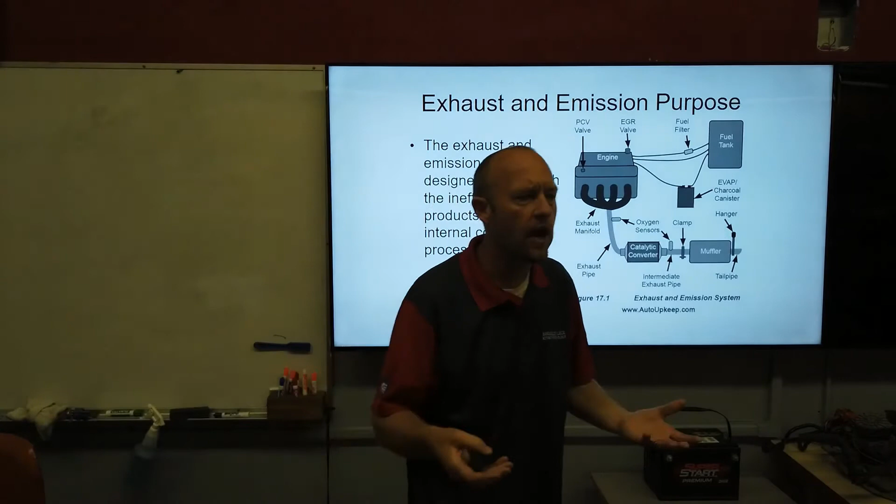This is a really basic overview of some of the emissions components that are there - the exhaust that is generated from a car. We understand from what we've talked about with fuel systems that if we nail that air-fuel mixture perfectly, then we really don't have emissions coming out the tailpipe. We have CO2 and water that'll come out the tailpipe.

But the reality is, in all the transient conditions of accelerating and decelerating and all the different air-fuel mixtures that the computer is having to produce to move this car down the road, the ideal air-fuel mixture is a hard target to hit. So vehicles do produce emissions, and we have a variety of different emissions components installed on a vehicle to clean up those emissions before they exit the tailpipe.

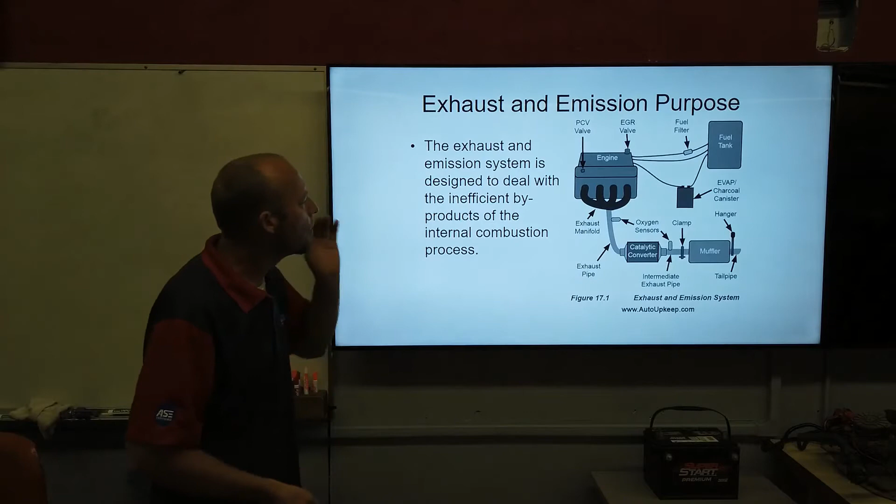The emission systems deal with the inefficiencies of our internal combustion engine. However, in modern times this has become an incredibly efficient engine, and the technology and monitoring systems that are there make it a very efficient engine. So we've got systems that are handling the different emission sources.

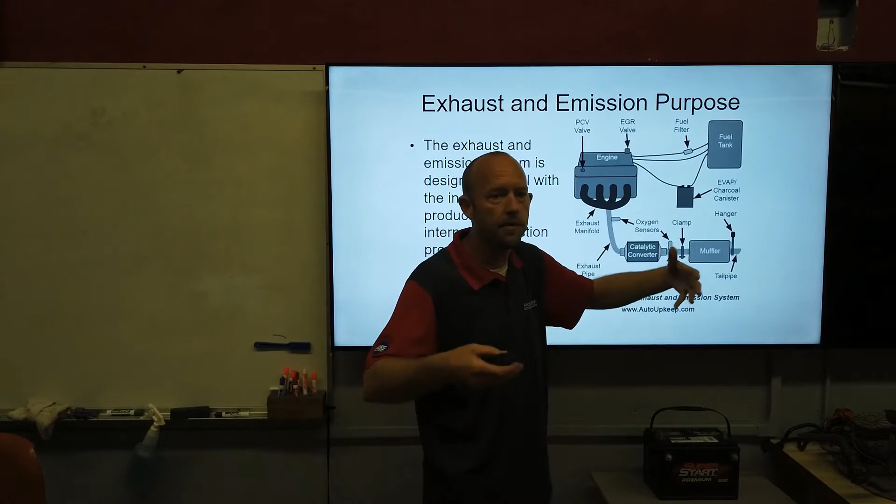Fuel by itself is a contributor to smog in our air. So we've got a system that manages any fuel that evaporates from the tank, called an evaporative emission system, or an EVAP system. Fuel vapor is captured and not allowed to escape out into the air.

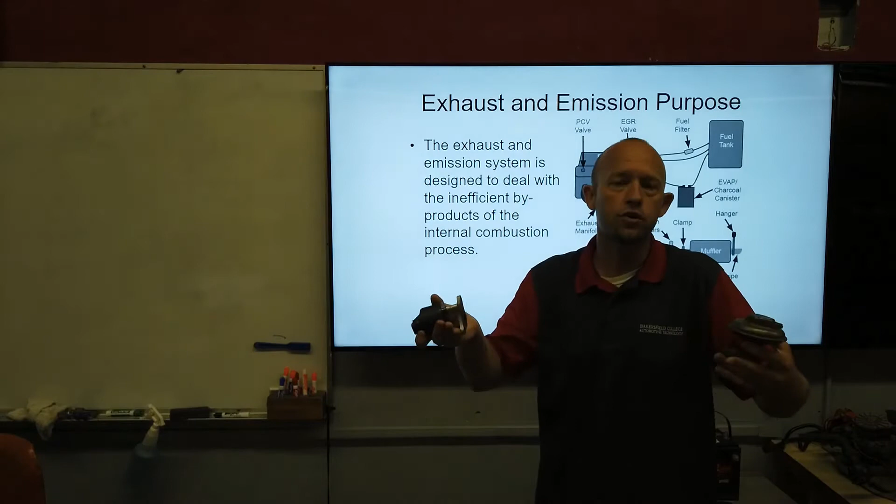We have an EGR valve - an example of those looks like this. This is one that is mechanical, vacuum operated, and this is one that's electronic. It's used to control NOx emissions, and we'll talk about how that is accomplished.

But we've got a PCV system. A PCV system stands for positive crankcase ventilation, and it's PCV, all right? Some people screw it up - they'll call it PVC, but that is a type of plastic pipe.

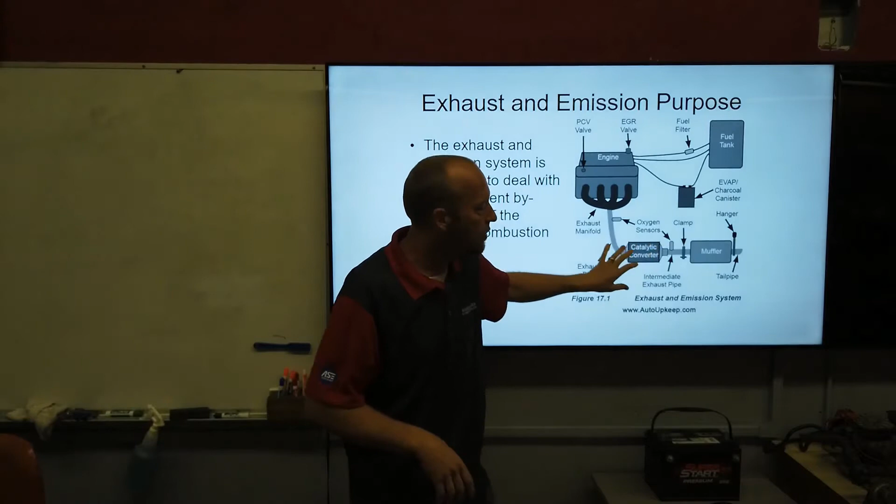The rest of this with the exhaust, we've got some other major components such as a catalytic converter, which is another place that we combust fuel in the exhaust and break down the emissions that we care about, which are HC, CO, and NOx. Those are the ones that we're trying to control primarily on our gasoline engines.

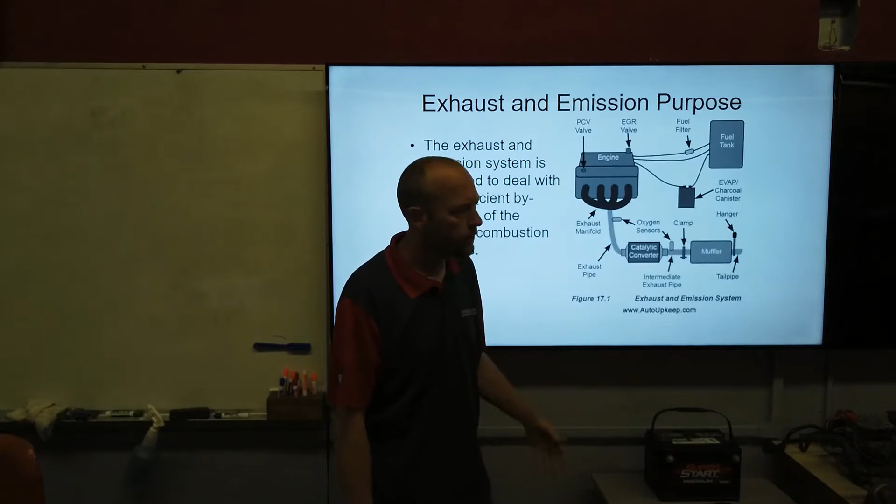And then we've got a variety of sensors that are involved to monitor all of these different emission systems. There's even some systems that are not listed here, but this is what you would typically have on a modern vehicle. Some of your modern vehicles don't even have an EGR valve - they'll just have the evap system, catalytic converter, and monitoring sensors.

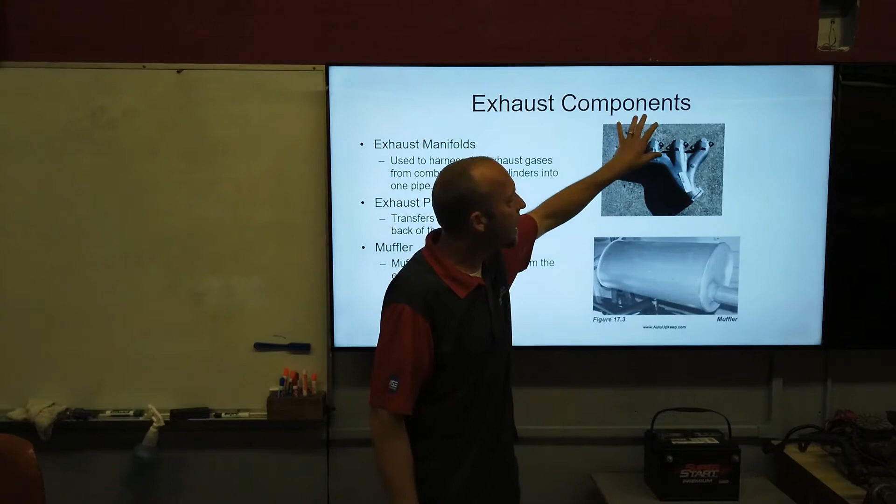So the exhaust on our cars is something that is a major source of the emissions that we deal with. Some of what I want to loop into this is just a general knowledge of exhaust components as well, and then we're going to get straight into some of our emissions. We've got exhaust manifolds that typically from the factory will be cast iron, or sometimes they're steel manifolds.

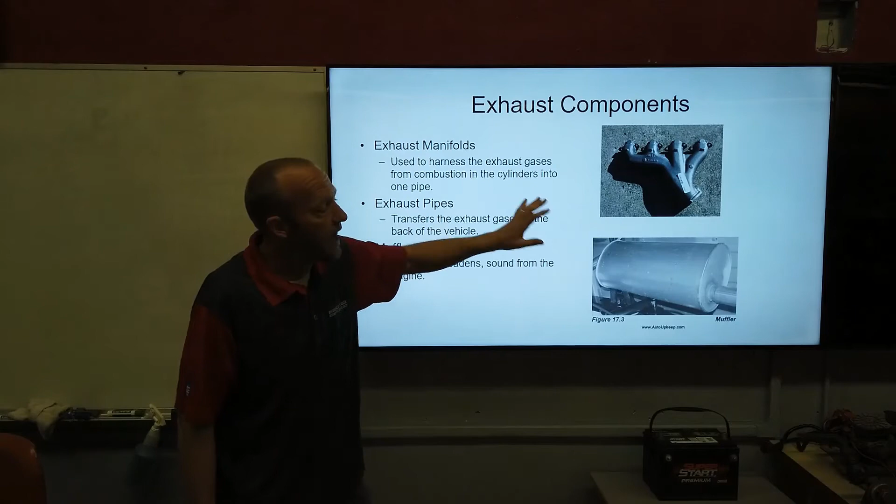We'll have mufflers that are designed to quiet the sound of the exhaust, although a lot of people will modify them to make them louder. Mufflers can be changed on the smog program. You don't even have to have a muffler on your car to pass smog. So you could cut past your last emissions device, which would be your catalytic converter, and just have a straight pipe from there, and that's not going to be an issue as far as passing smog. This is not considered an emissions device.

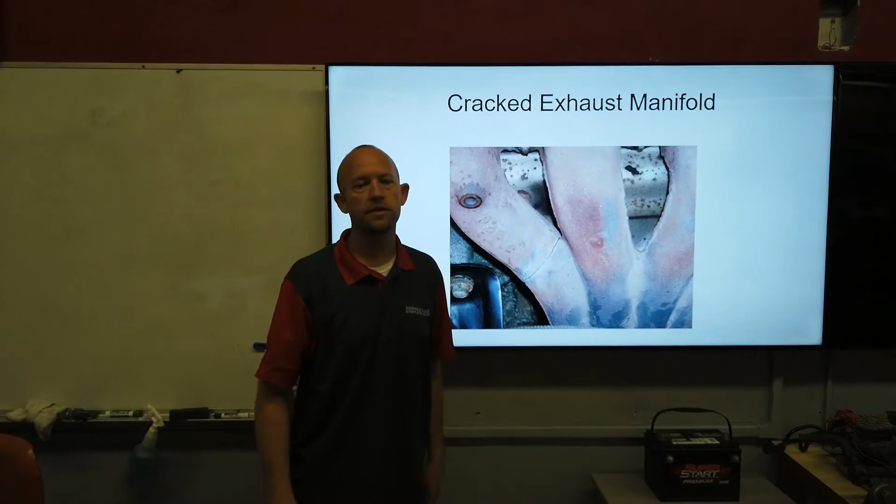However, the exhaust manifolds can crack, and that can cause problems with setting codes for catalytic converters or oxygen sensor codes as we introduce fresh air. Consider that the exhaust gets incredibly hot and then cools off, over and over, reaching temps of 800 to 1,000 degrees just on a gas car. That causes the exhaust to flex as it heats up and cools down repeatedly, which can fatigue it.

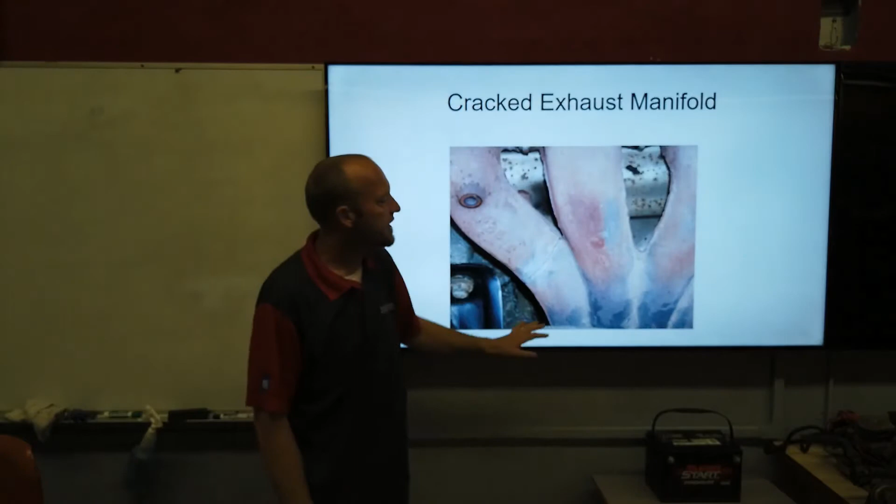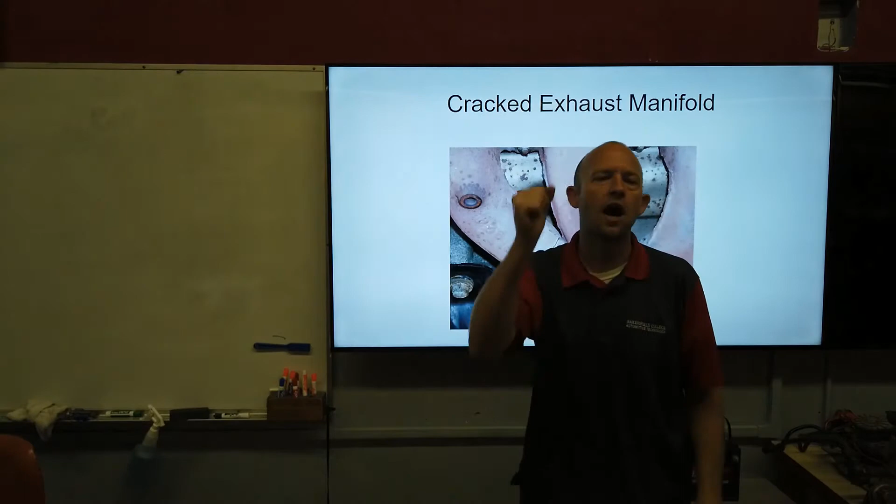Cast iron is brittle and it can crack. When you have a cracked exhaust, you can hear it. It's usually more noticeable in the mornings when the vehicle is cold. It'll sound kind of like a ticking, breathy sound. Every time we have that exhaust stroke and we're pressurizing the exhaust as we're forcing those gases out, it'll leak out of that crack.

This is something that we watch for. It can turn your check engine light on. It's not necessarily something that often causes a performance problem, other than if it affects an oxygen sensor and turns your check engine light on. But this is something that your car would fail smog for.

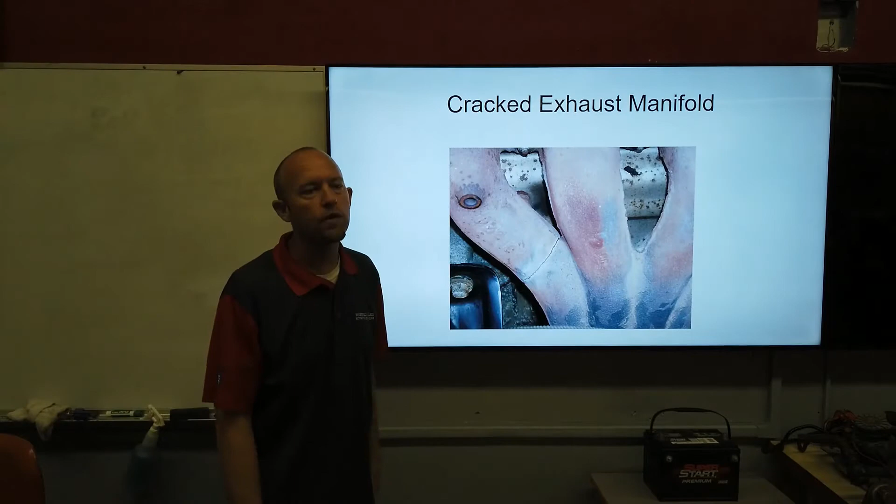Oftentimes stuff like this happens because of broken exhaust manifold bolts. If we have bolts that break, it allows that part to flex even more. Some of this is just bad engineering design from the manufacturer—they've designed in weak points that would fatigue and crack.

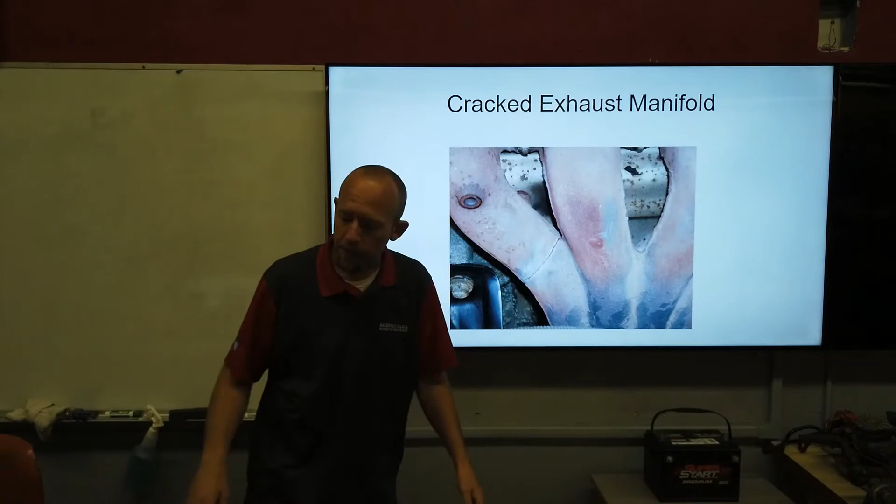The noises that you hear—you can often see black soot around the areas where the exhaust leak is, which helps detect where it is, and it can cause check engine lights to come on. Broken studs are probably one of the leading causes for broken exhaust manifolds, as well as broken exhaust hangers.

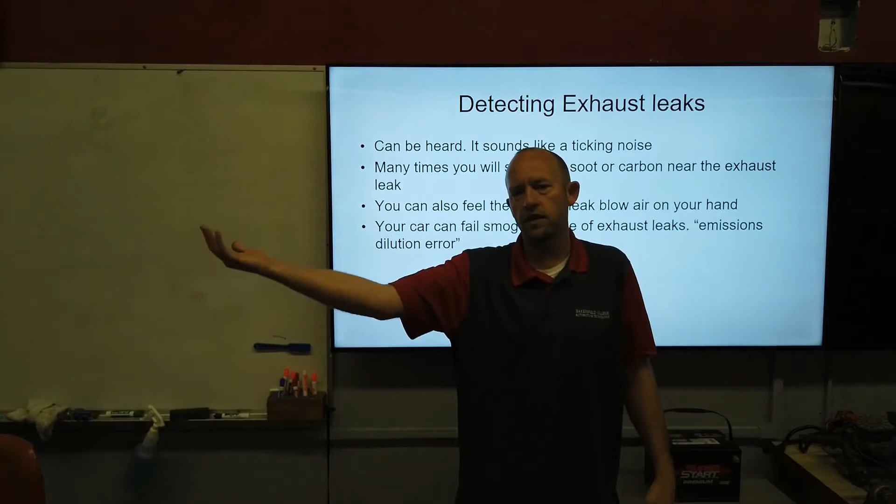The exhaust hangers support the weight of all that exhaust. As we break hangers, the weight of that exhaust lands on the remaining hangers as well as on the exhaust manifold.

So it's something that when I'm underneath cars, I take a look and make sure the hangers aren't broken. Some of you have seen cars where the exhaust hangers are all broken and the exhaust is dragging or almost touching the ground as they're driving down the road. That ends up cracking exhaust manifolds from the strain of the weight of the rest of that exhaust.

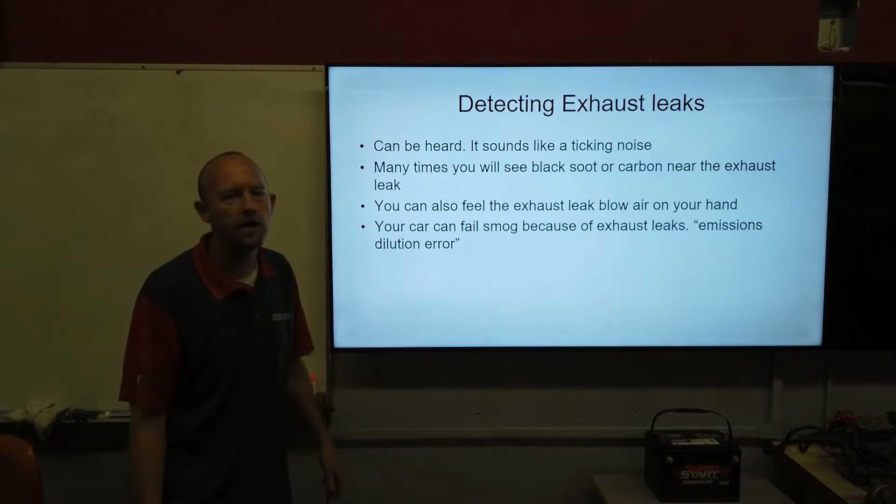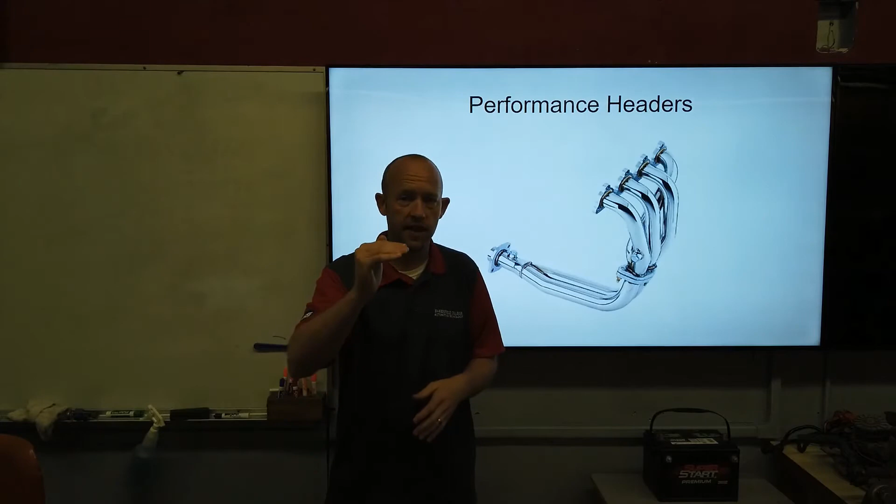The exhaust manifolds are something that's common to be modified on cars, so you get people that will put headers on their car. As part of the smog program, any aftermarket part that is not the stock component the vehicle came from the factory with has to be approved. When that car was sold new, it went through a rigorous testing regimen called the federal test procedures, to prove that vehicle meets the emission standard for that model year and class of vehicle sold.

So anytime we modify a part on the car—whether that's headers like this, aftermarket air intake systems, intake manifolds, camshafts, cylinder heads, anything that touches an emissions component, fuel tanks, even auxiliary fuel tanks—anything that has any potential effect on emissions has to go through a process of recertifying that car through the Air Resource Board in order to be approved for installation on any production car.

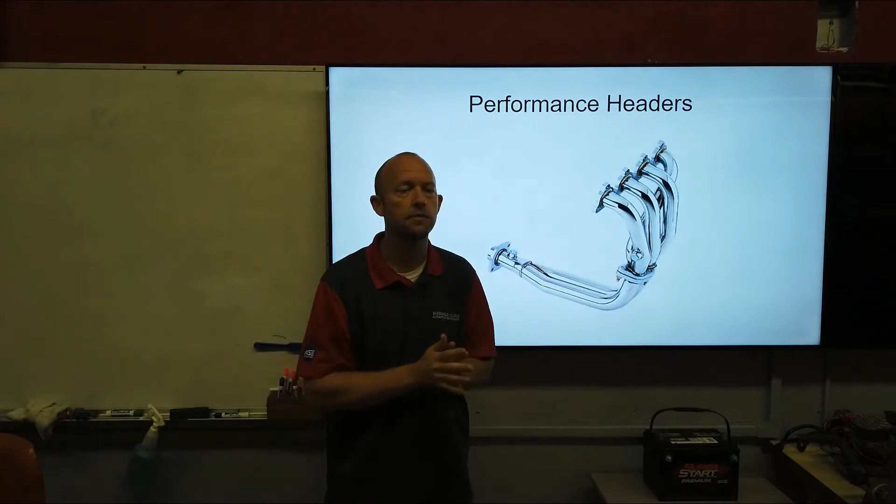When that part is approved, it will be affixed with, or come with, a label showing an executive order number and a part number that can be looked up on the Air Resource Board website. As part of the smog program, any aftermarket part—most commonly headers and aftermarket air intake systems like filters and ducting, the two most common things to see—we have to look up to see if it's approved to be on this car. I want to share something with you about the header that's up on this screen.

This header has a port right here for an oxygen sensor, and another port down here. Aftermarket parts companies like DC Headers, for example, will often make that header for both an off-road application for non-street use and for street use. They'll get it approved if it's a common and popular car, a Civic or a Chevy pickup or a Dodge or whatever.

In the process of producing a header for that engine platform, they run it through and get it approved by the Air Resource Board. But that header will often be designed with two different uses: for a non-street, track application, and for a street use application.

If you ever buy headers online or things like that, one of the things you'll want to pay attention to is whether it's California approved. If it's a California approved part, then it would be legal to put on your car if it fits that application.

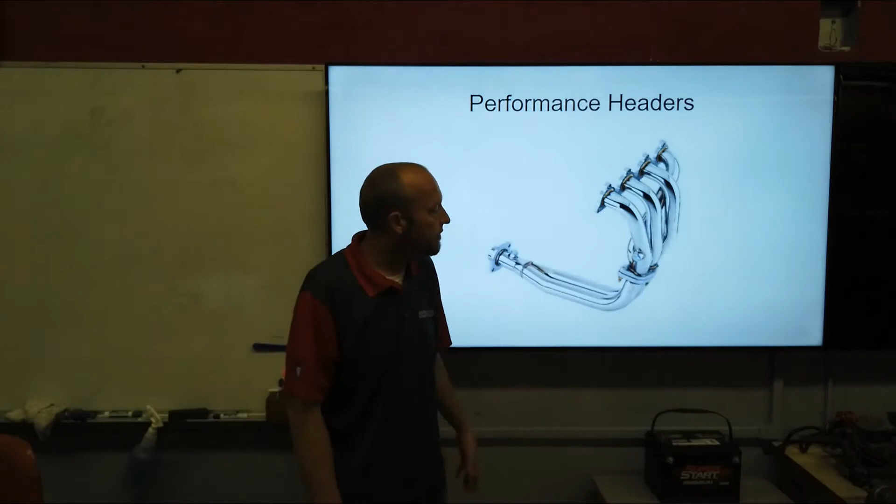One thing I want you to pick up on if you're buying headers on eBay or Craigslist, used, is that if you see it only has a port right here that goes for this runner alone, I can tell you that will never be an approved header. That will be a non-street use, off-road application only.

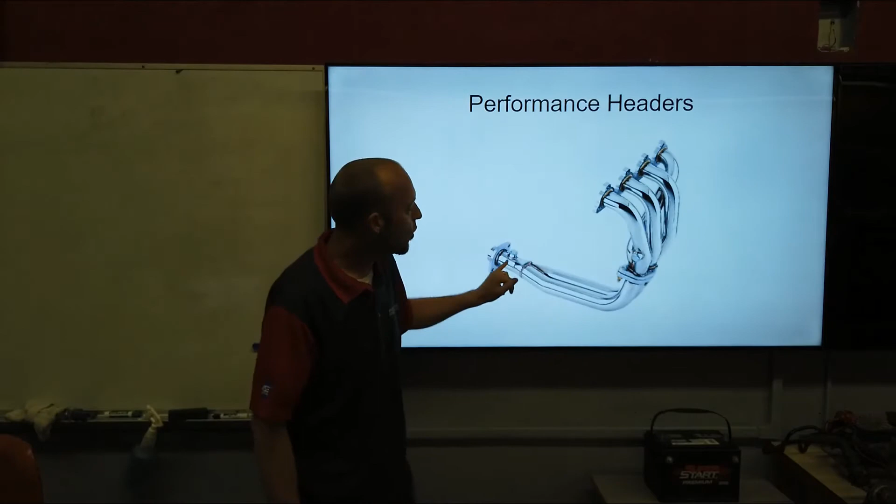That will never be a 50-state approved header, because the point of an oxygen sensor is to monitor the exhaust gas for all of the cylinders on that bank. So when it's designed with a location there and a location here, when you install it on your car, you're supposed to use the one where it monitors all the exhaust gas coming from that bank of cylinders, not just the one from a single runner.

So if you were looking at one online and you noticed it only had a port on one runner, I can assure you that will not be a legal header.

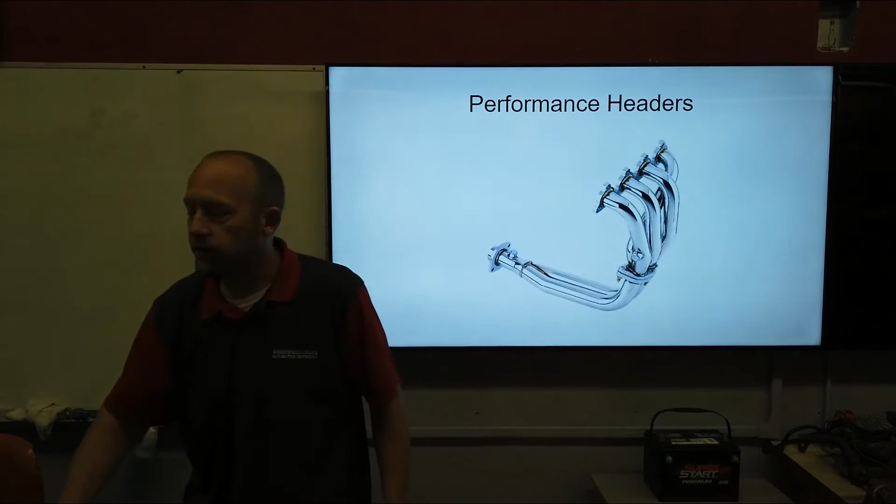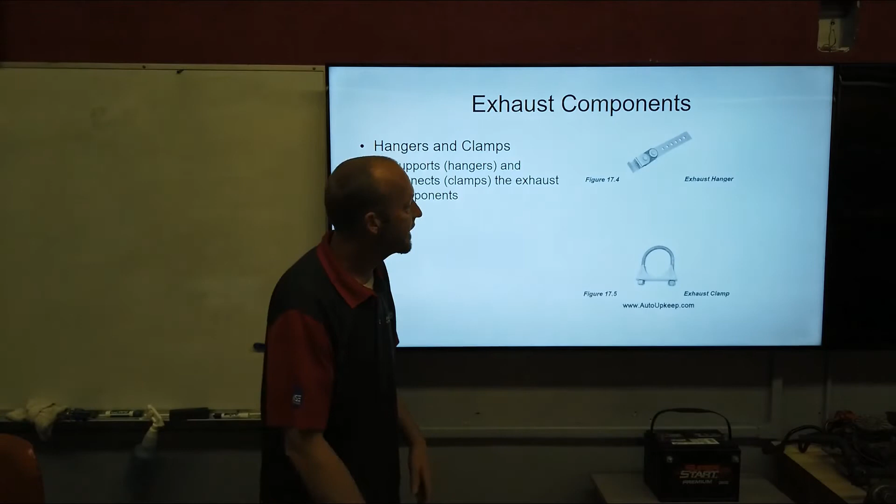Moving on, we've got our hangers. The hangers support the exhaust. If you ever find broken hangers, that's one of the things that leads to cracked exhaust manifolds and damage to the manifolds. Clamps are an acceptable way to put an exhaust together, either clamped like that or welded. Sometimes they bolt together with flanges and a gasket. But all of that stuff we'll pay attention to and watch for just as maintenance level information.

I've already mentioned in previous lectures that PB Blaster is a good product for dealing with rusted bolts and stuff like that. My main preference for PB Blaster is the way it shoots like a squirt gun. There's probably a lot of chemicals out there that work well as a penetrating oil to help deal with rust, but this one is readily available and one that I would even recommend.

There's different colored smoke that can come from the exhaust system on a car, and the color of the smoke tells us something about what type of fluid is being burned. When you see blue smoke, one with a blue tinge, we're burning oil. That could be engine oil, transmission fluid, or power steering fluid, depending on the application and the age of the car.

For more modern vehicles, blue smoke is almost impossible to get from power steering fluid or transmission fluid. They don't have devices connecting that transmission to the engine, and the power steering systems are electronic, so that's not an option. So if you saw blue smoke on a modern vehicle, it pretty much has to be engine oil.

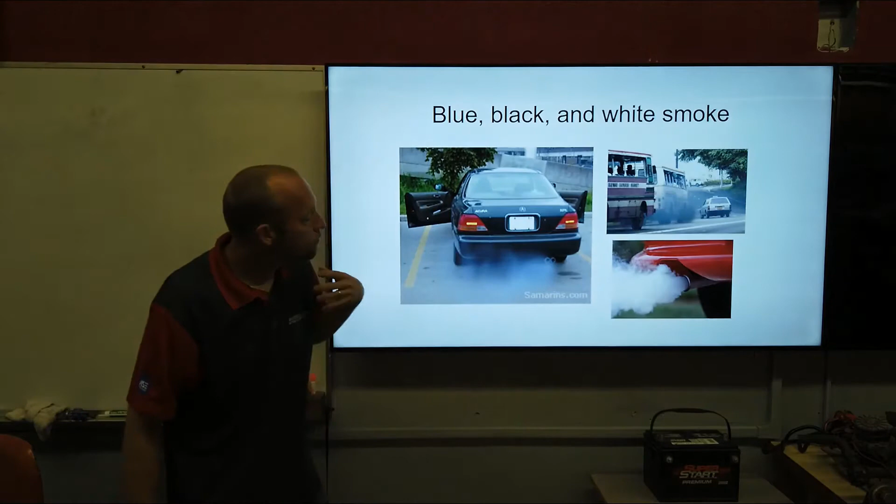But some older applications could burn tranny fluid or power steering fluid, since there was a connection between the engine and a vacuum line between those components. Regardless, blue smoke is burning oil of some sort. The way you'd know which one it is: pull the dipsticks. If you're seeing blue smoke from a car, whichever fluid it's burning will be low, so if the tranny fluid's low, it's probably burning the tranny fluid on that old car.

If the power steering's low, it's probably burning power steering fluid. If the engine oil's low, then it's burning engine oil. So that's at least the logical way to go about it, and then track down the source from there. But if you get blue smoke under acceleration, then it's usually rings.

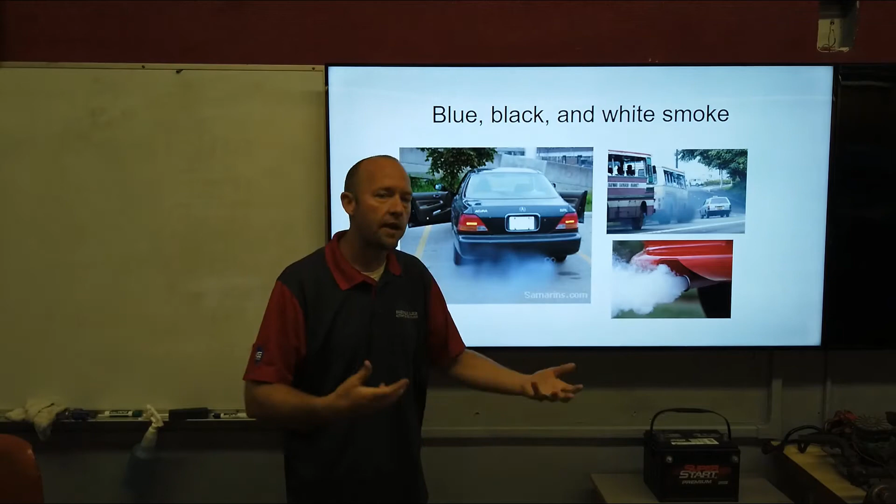If you get blue smoke on a cold startup, then most of the time it's valve stem seals, from the car sitting overnight and the valve stem seals being bad. Oil drains down into the combustion chamber, and when you first fire it up in the morning, it burns off some oil. If you have a turbocharged vehicle, turbo seals can go bad, and we can burn oil that way too, on a turbo or even a supercharger.

So black smoke is going to be from cars that are over-fueling and running rich. White smoke can be a variety of different things. Most commonly we see it on colder mornings where it's just steam, because water is a byproduct of combustion, so it can be completely normal to have water dripping out of your exhaust and to see steam coming out of the exhaust.

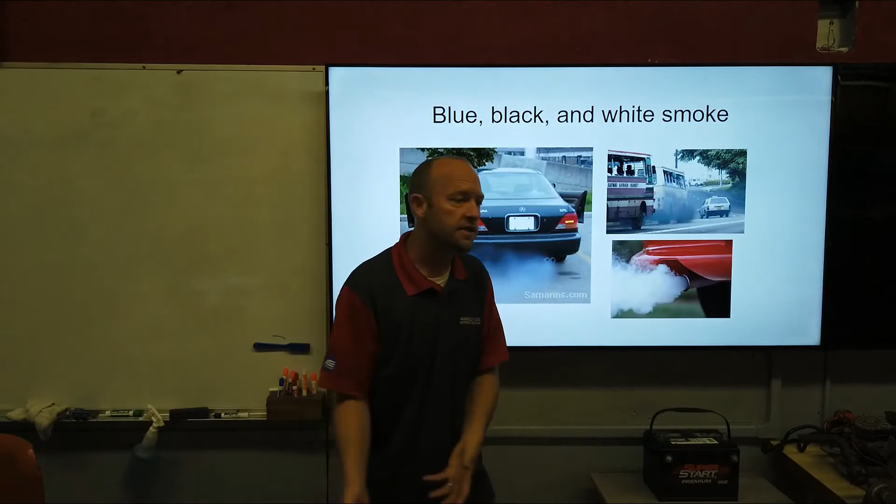It does not fail smog for condensation or steam. However, if it's coolant, that will also come out as steam if you had a blown head gasket or things like that. If it's a diesel engine, it can be raw diesel fuel being steamed out the tailpipe, or it could even be a leaky diesel exhaust fluid or DEF injector.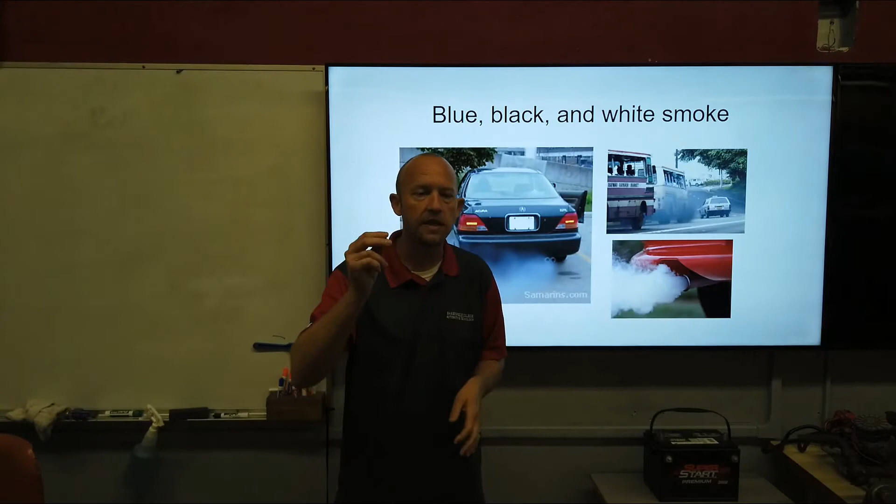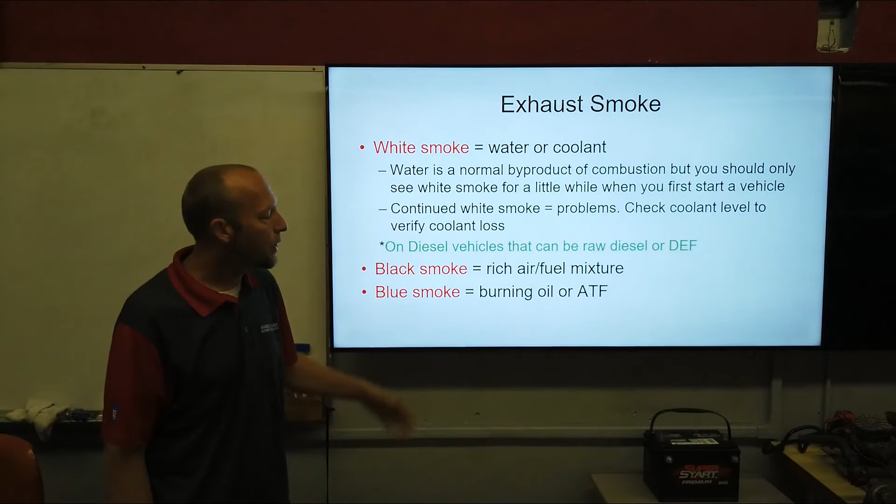So these are some of our possibilities for the different colored smoke. White: water, coolant, but it could be DEF or diesel. Black smoke is a rich air-fuel mixture, a vehicle that is over-fueling. And then blue smoke is burning oil or ATF, potentially power steering fluid.

So now we're going to cover some of our major emissions control systems. The emissions we're trying to control primarily are HCs, or hydrocarbon emissions, CO, carbon monoxide, and NOx, or oxides of nitrogen. Those are the primary controlled emissions for a gasoline vehicle, and there are allowable amounts regulated by the government.

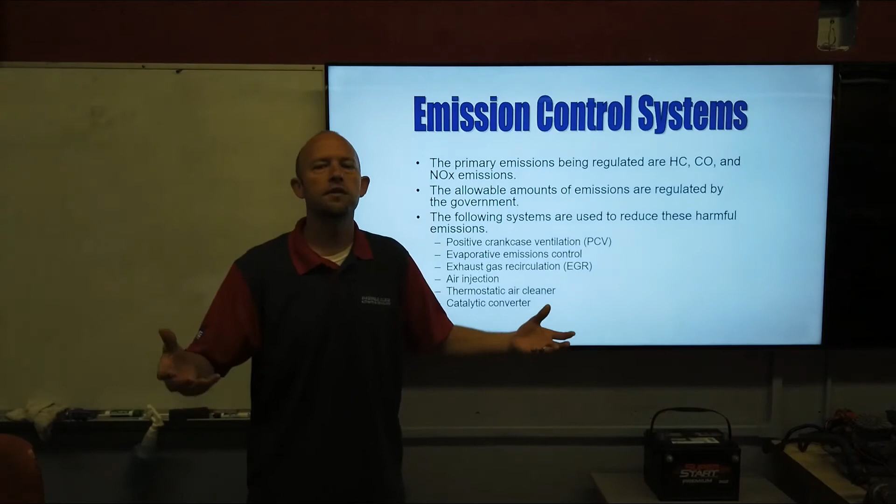I have to throw this in, in case I haven't said it before: if you pay attention to the automotive industry, there's often a perception in the public that manufacturers are raising prices on these cars to try to be more profitable. The reality is that everybody's in business to make a profit, they have to maintain a profit margin. My observation of what takes place in the industry is that cars get more expensive because of government regulations.

The government regulations enforce and mandate a certain emission standard. They mandate a certain technology for safety, whether it's emissions, tire pressure monitoring systems, every car has to have airbags, every car has to have ABS, and so on. They mandate certain emission standards, and to achieve those government regulations, the technology to support that makes these cars more expensive.

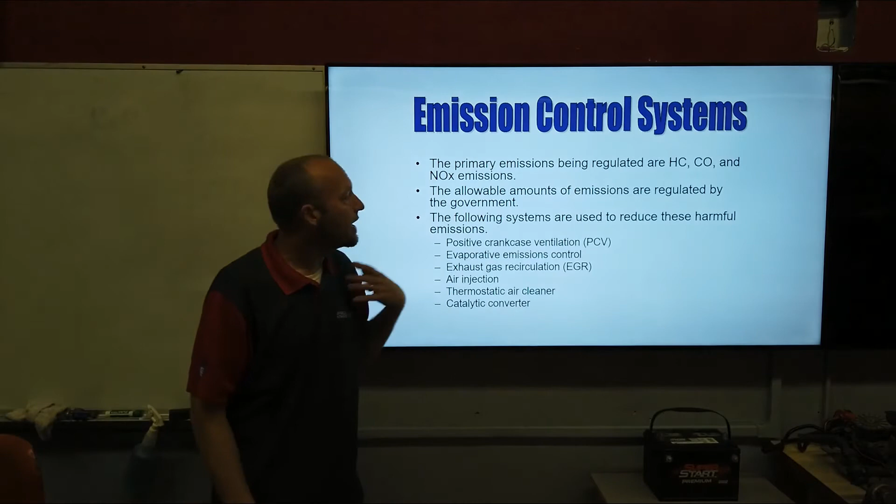I'm reminded of that when I look at my statements that say the allowable amounts are regulated by the government. So it's not the big business manufacturer raising the price of these cars, it's them chasing the government regulations. So blame the government for the cost of the car, because we could make them a whole lot cheaper if it wasn't for the standards they're putting in place, especially the fuel economy standards and emission standards.

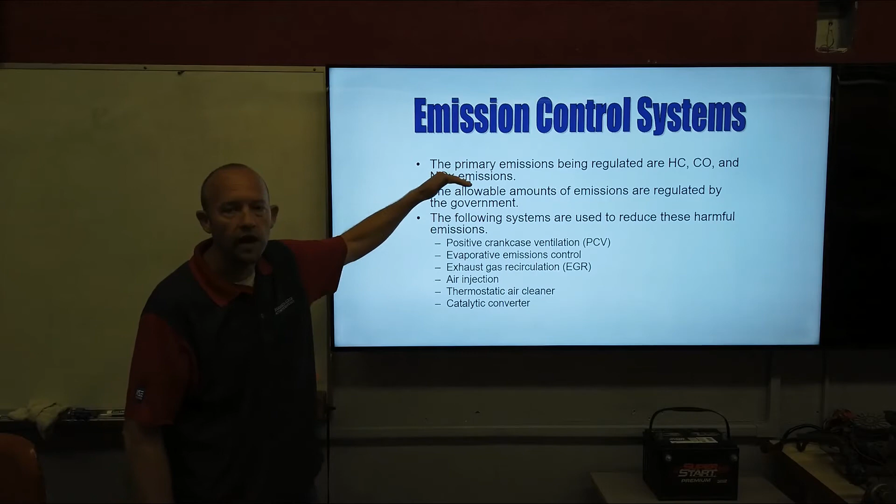So these are some of the emissions components we're going to cover that are used to control our HC, CO, and NOx, and most of these target a more specific category of emissions. I want to give some definitions to the emissions we're going to talk about first, so these definitions give a functional way to understand what that emission is on a smog report or when you hear it talked about.

So HCs, or hydrocarbon emissions, are raw fuel, any raw fuel. Gasoline is a hydrocarbon emission, diesel, propane, ethanol, methanol — those are all hydrocarbon-based fuels. There are differing amounts of hydrogen and carbon, but at their base they're a molecule composed of hydrogen and carbon. So HCs is raw fuel. All petroleum products are HC-based.

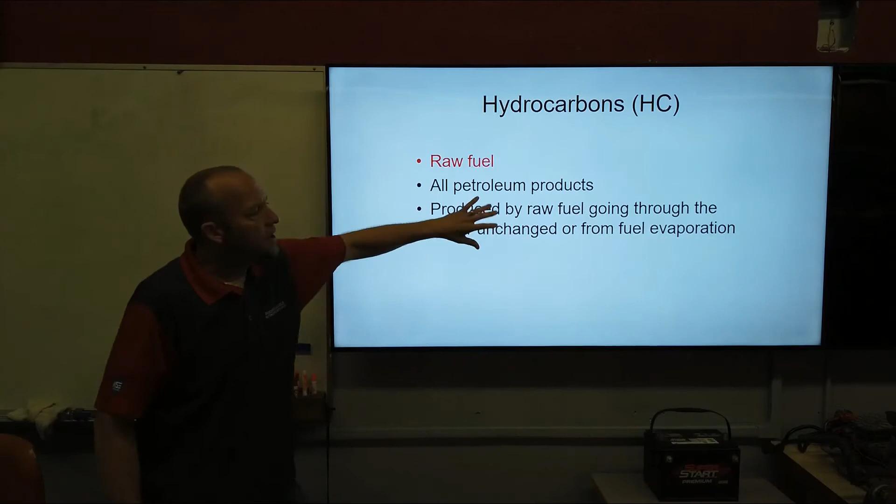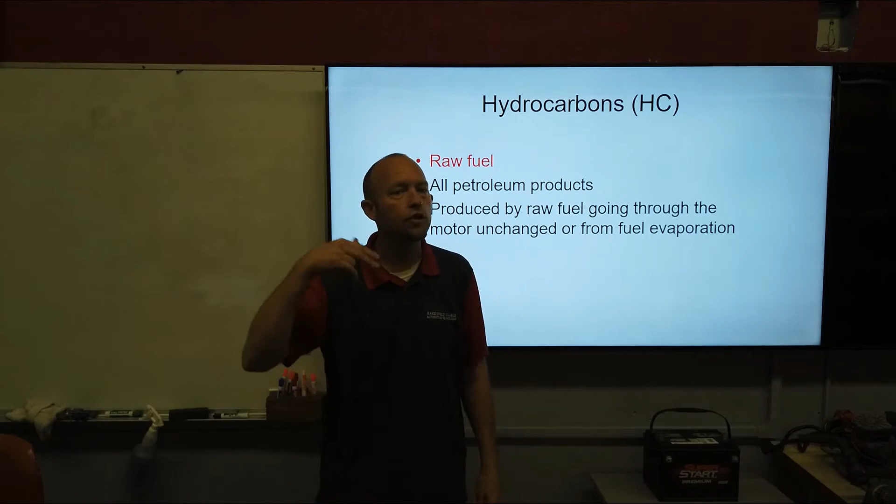So the source of this is either fuel that comes straight out the tailpipe — understand, if fuel went into the motor and left unchanged, then we didn't burn it, right? That's what takes place if you have HCs coming out the tailpipe: that fuel came into the motor and left unchanged. So that should clue you in to the types of things that can cause HC emissions.

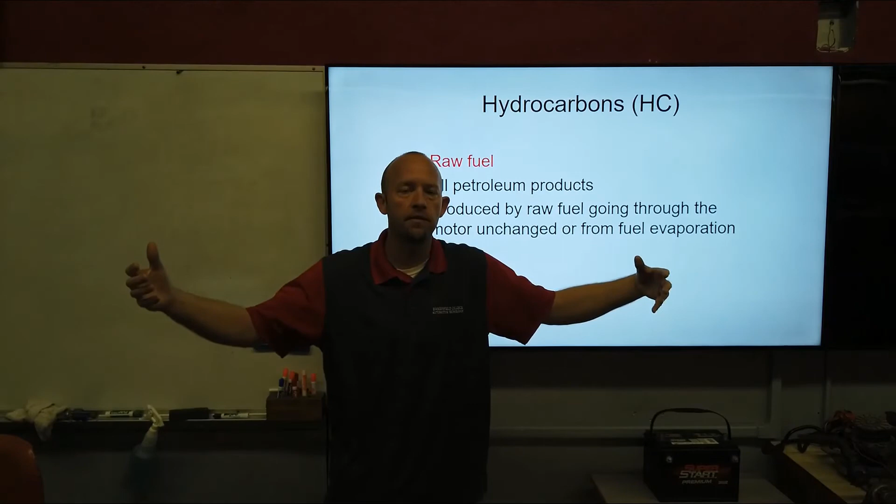Could low compression cause hydrocarbons? Yes, because if you can't compress it, you can't light it, right? Misfires of any sort cause hydrocarbon emissions. So ignition system doesn't light it, low compression, lean misfires. Another source of hydrocarbon emissions that allows it to escape into the environment from the vehicle is if it evaporates in the tank and escapes out of our fuel tank.

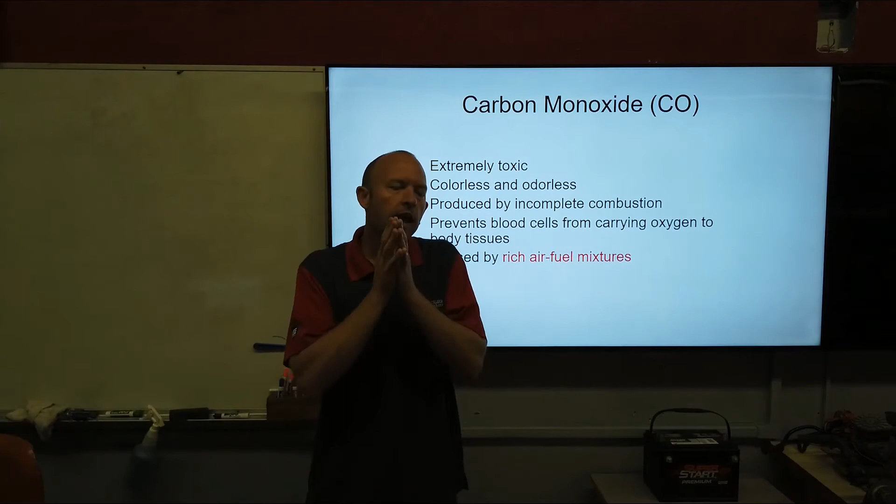And so not all CO is colorless and odorless, and you can smell it. It smells like rotten eggs. I'm sure all of you have driven behind an older car where you could smell their exhaust. You're smelling the CO. Now, we can see it, we can smell it. So it's not an entirely true statement to say it's colorless and odorless. No, when you can see it, it's black, right? I can smell it, it smells like rotten eggs.

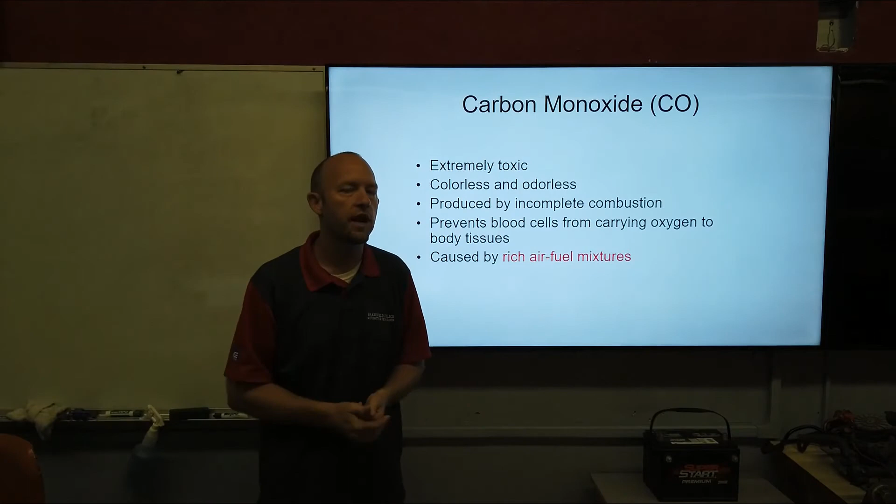Now, the dangerous part about CO is that even when you can't see it and you can't smell it, it can still kill you. Which is why that statement has come around to be, is that it's not that it's always colorless and odorless, but the dangerous part about CO is that even when you can't see it or smell it, it can still kill you. You only get CO from cars that are running rich.

Now, quick little demonstration. In the motor, what comes in is fuel, right? So this is fuel. Then we have oxygen, and then there's nitrogen. Then we burn it. So we separate our hydrogen, we separate our oxygen, our carbon, and then we add oxygen to this, right? H2O, CO2. And that's what should come out the tailpipe.

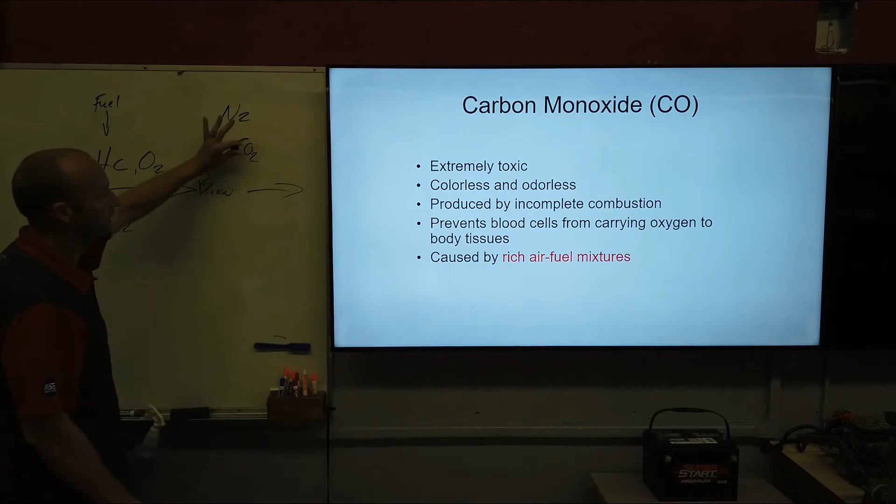But when things are not perfect, then you'll get your N2 too that would come out. That would be ideal, right? If we burn it and we make this. But if we add too much HCs, then we make H2O, and then you run out of oxygen, so then you make CO instead of CO2. So if you run out of oxygen because you added too much fuel, then you will make carbon monoxide because we're one less oxygen molecule there, because we didn't have enough oxygen to go around with the carbon that was present in the combustion chamber. So then it makes CO.

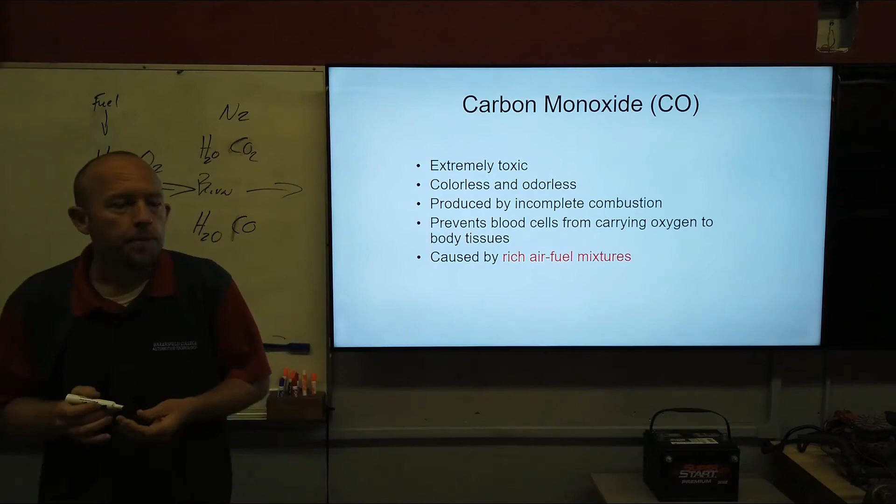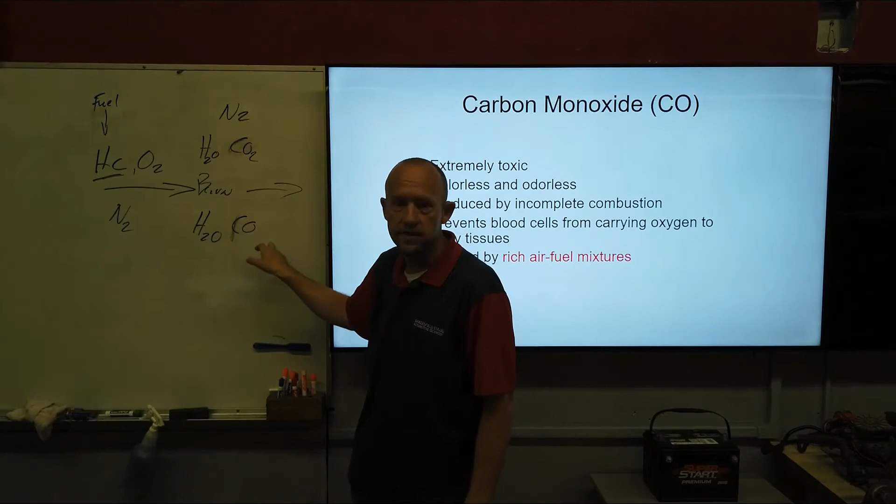Hopefully that makes sense on a chemistry level, how we get CO. If you add too much fuel, then there's too much hydrogen and carbon for the available amount of oxygen in the air, and so there's not enough oxygen to go around to make CO2, so you make CO instead. CO2 is considered complete combustion. CO is considered incomplete combustion because it didn't completely burn and make CO2, but it didn't completely burn because we ran out of oxygen from overfueling it, running the car on too rich a mixture. So the best way to understand CO as an emission from a diagnostic standpoint as a technician is that you only get CO when cars are running rich or being overfueled.

Then we get to oxides of nitrogen. This is a relatively simple one to explain, that there is nitrogen present in the air, about 76% of the air is nitrogen. So if combustion chamber temperatures exceed 2,500 degrees Fahrenheit, then nitrogen and oxygen begin to combine. And so that is the source of NOx, high combustion chamber temperatures.

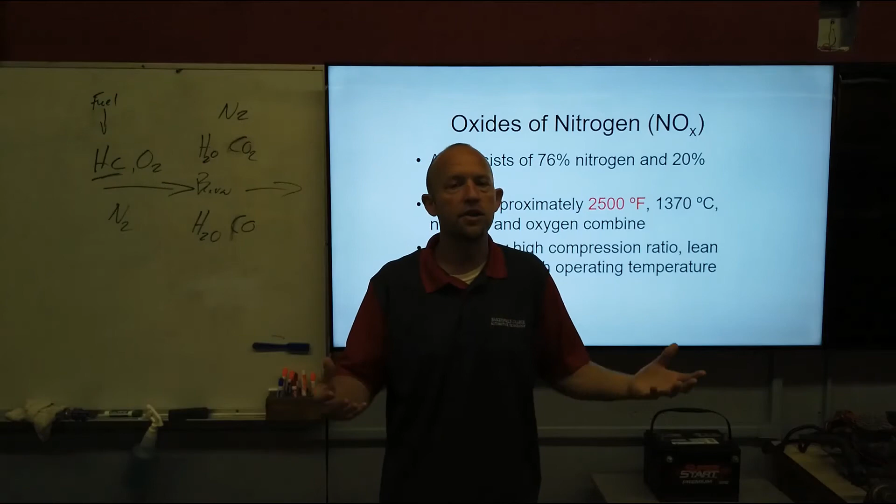Now pressure and temperature are related, so it could be high cylinder pressure, right? Can timing affect that? Yes. Spark timing? Yes. Can compression ratios of how that engine is mechanically constructed affect that? Yes. And just the running condition of the vehicle, when vehicles are under load, they produce NOx.

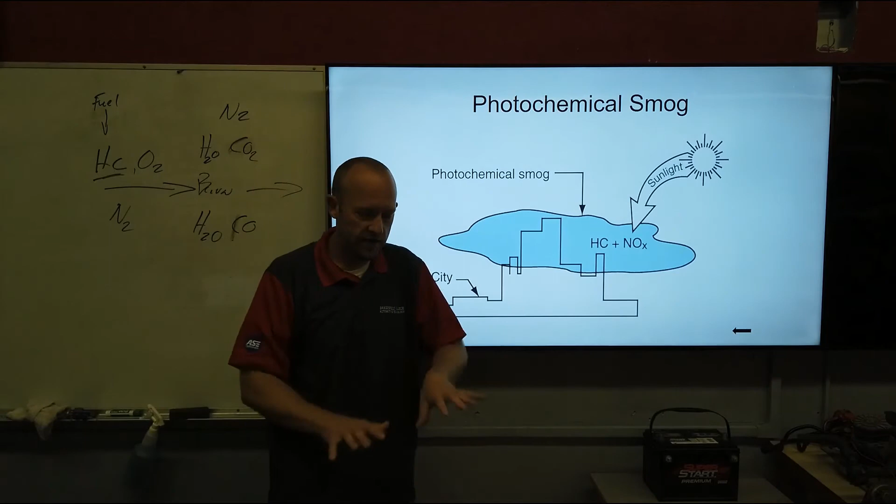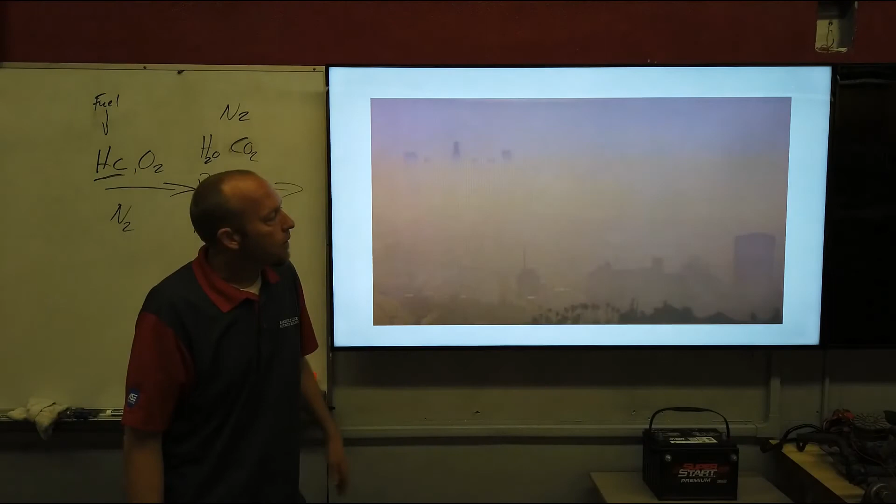When they talk about it from a medical standpoint, they'll typically refer to it as ozone. And ozone is the same ozone that's up in the atmosphere, but when it's down at ground level, we refer to it as smog. Smog is a made-up word that has to do with smoky fog. You put it together, it's the layman's term for ozone. Smoky fog is the word, smog, combine those two words. And so this is visible. Here's the deal, that's a picture of LA in the 70s.

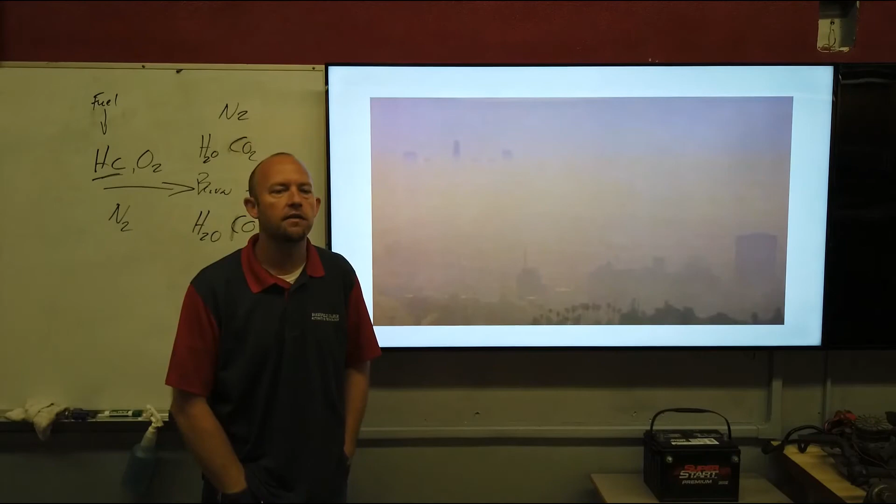I have no problem admitting that I got into the smog program as a technician to make money. That's the whole reason. I didn't go in to save the world or the planet, and that's still not my motivation. People have to come back and see you every 2 years, so it's a pretty secure job. The government makes them come see me whether they like it or not. So that's my motivation for getting into the smog program.

However, I don't want to live in that world. This is modern day China, and that's what their air looks like. That's LA in the 70s before the smog program came into being. I didn't live through those times, but I know people that have. The smog referee here on campus grew up in LA, and he said there were some days down in LA that you couldn't see from one telephone pole to the next, and to breathe that air would burn your lungs.

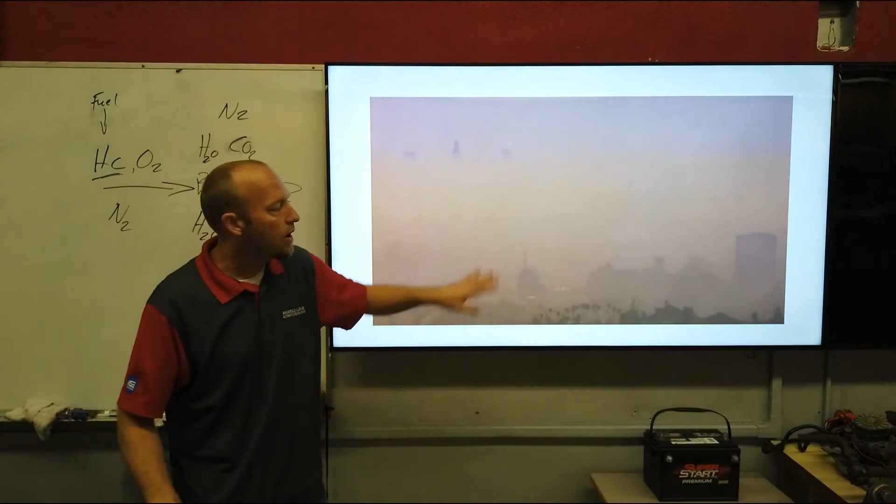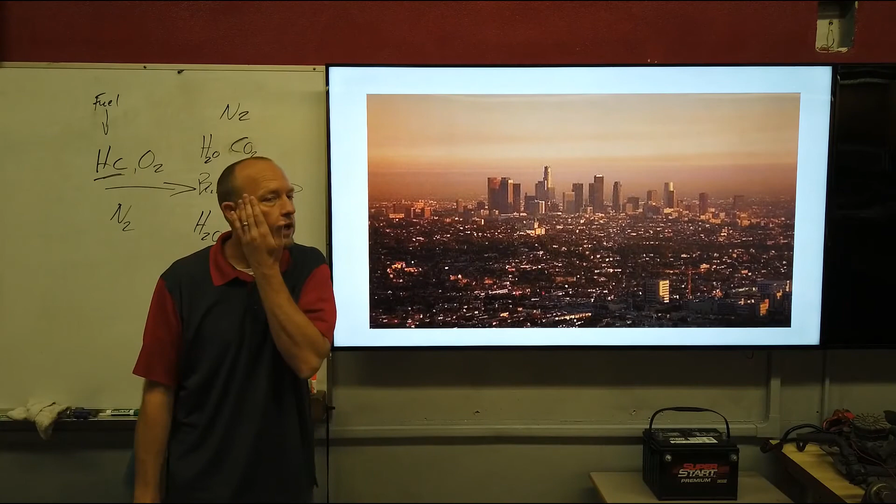So even though that's not my motivation, there's certainly a level of the smog program that is good for public health. This is modern day LA - better, right? Certainly better. That's actually the same camera view, so you can see this little tower here is that building right there. Significantly better air because of the smog program and cleaning up emissions on cars. So even though my motivation is to make a living for my family, there's certainly a benefit to the smog program because I don't want to live in that world.

There's a significant relationship between the air-fuel mixture we run our vehicles at and the emissions that come out the tailpipe. The air-fuel ratio we run our vehicle at is not only ideal chemically for getting the most out of the energy from burning this fuel, but it's also the compromise for the best emissions.

The stoichiometric air-fuel ratio is not the best for power - the best for power is more like 12 to 1. The stoichiometric air-fuel ratio is also not the best for fuel economy. The ideal air-fuel ratio for fuel economy is more like 16.5 to 17 to 1, which would get us better fuel economy.

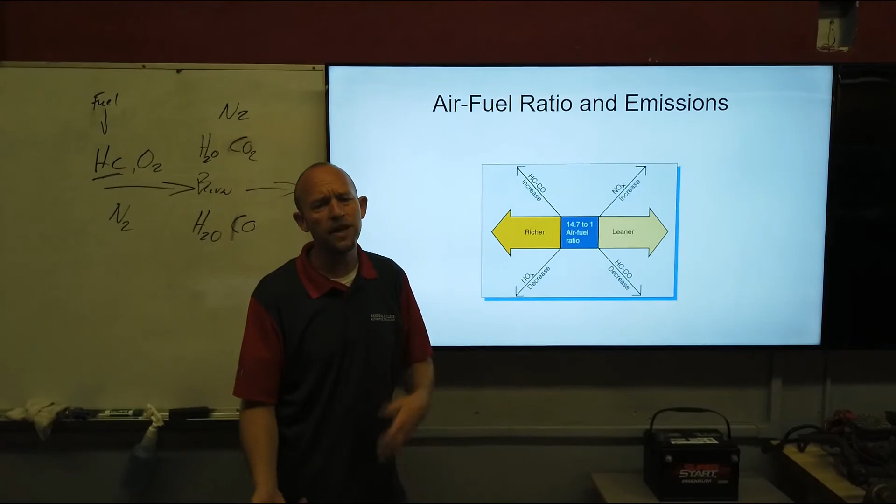However, anytime we move away from stoichiometric air-fuel ratio, we have a problem with other emissions. If we add less fuel and go leaner, although that's better for fuel economy, it raises combustion chamber temperatures, so you start to see NOx emissions increase. If we're adding less fuel, then obviously we'd see HC and CO decrease.

If we go richer, that's better for power - sometimes we do run that mixture when we're trying to pass somebody on the freeway or get on the freeway. But when we do, if we're adding more fuel, then we'd expect HC and CO would increase. Adding more fuel actually absorbs heat and cools off the combustion chamber, so NOx decreases. However, the best for HC, CO, and NOx is going to be a stoichiometric air-fuel ratio.

So the sources of vehicle emissions come from different places. The majority obviously comes out the tailpipe. However, uncontrolled, about 20% of emissions would come from fuel evaporating, and another 20% would come from crankcase vapors. So there's your fuel evaporating, there's your crankcase vapors, but the majority comes out from the tailpipe.

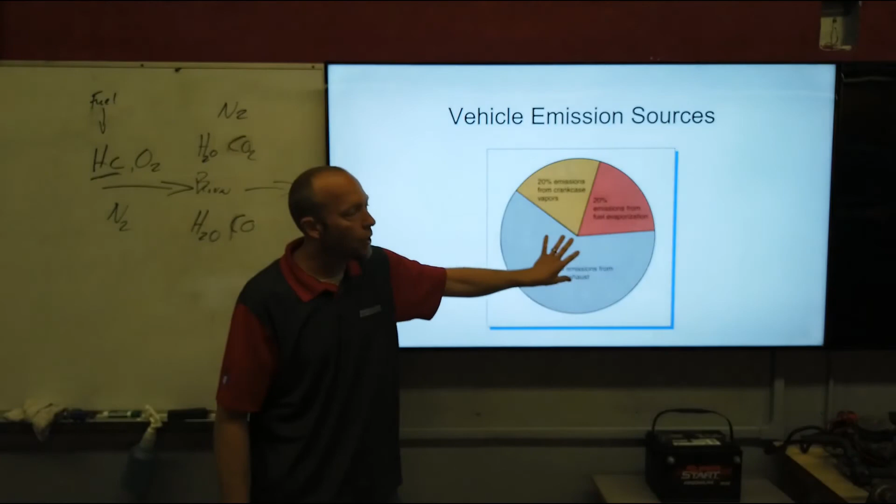However, all of these areas are controlled on a vehicle with emissions devices. We've talked about the information that is on an emissions control label. I've tried to express that this is our most accurate place to get the year of the car and the engine size. The other information on there is stuff we use when we smog a car - it tells you what emissions components are required to be on that car, and gives us information about that.

There's also some tune-up specs and different things on there, whether a car is OBD2 certified or not. But as it relates to emissions, it gives us a list of the emissions components that are on there. So this car has a 3-way catalytic converter, has air-fuel ratio sensors, has heated oxygen sensors, and it's sequential fuel injected. So it gives us a list of some components that are there.

Some of the stuff that's not on this is the fact that all cars are going to have a PCV system of some sort. All your gasoline vehicles are going to have an EVAP system of some sort. They don't need to list it, and they don't, because all of those vehicles have those emissions components.

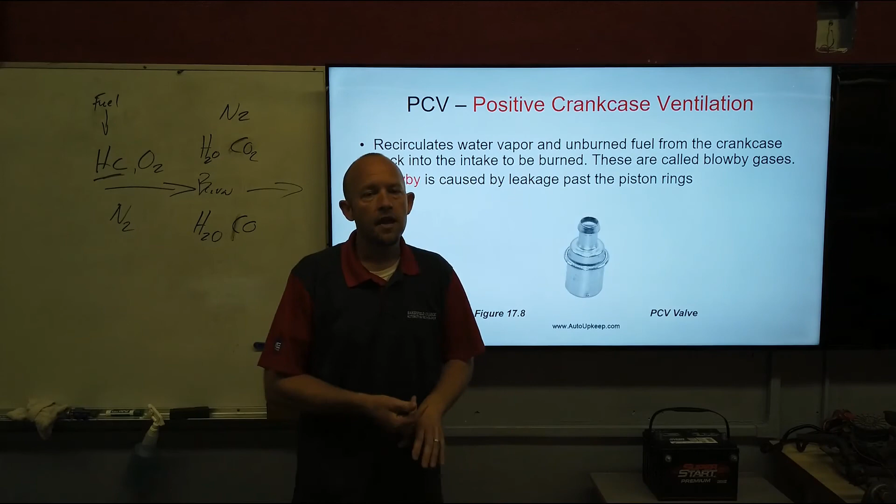So, positive crankcase ventilation, PCV system is one of the first ones that I want to cover. PCV's job is to control HC and CO, and it controls blow-by gases. Whatever combustion gases get by the rings and settle in the crankcase, they're not going to just escape out into the air. That would build pressure in the crankcase.

Early and older cars just had a vent that kicked out blow-by gases into the air. They called it a draft tube, that they just vented out into the air. Modern vehicles are a sealed PCV system. We need a PCV system just functionally on a car. But what they do now is they ensure that PCV system is routed back into the motor to where those vapors from blow-by gases get burned.

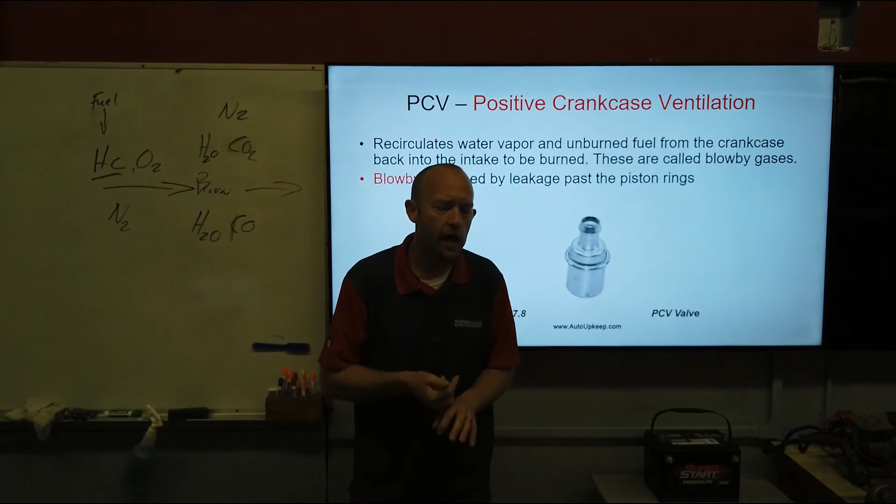Without a PCV system, we would build too much pressure in the crankcase, and it would blow gaskets out and stuff like that. Because rings on the piston have a gap, and so there's always a space for blow-by gases to get by. Even on a perfectly good running engine, you're not completely sealed around the piston, and so we'll always get some blow-by gases past the rings. Obviously, when you're under hard acceleration and making more power, you have more blow-by gases than at idle.

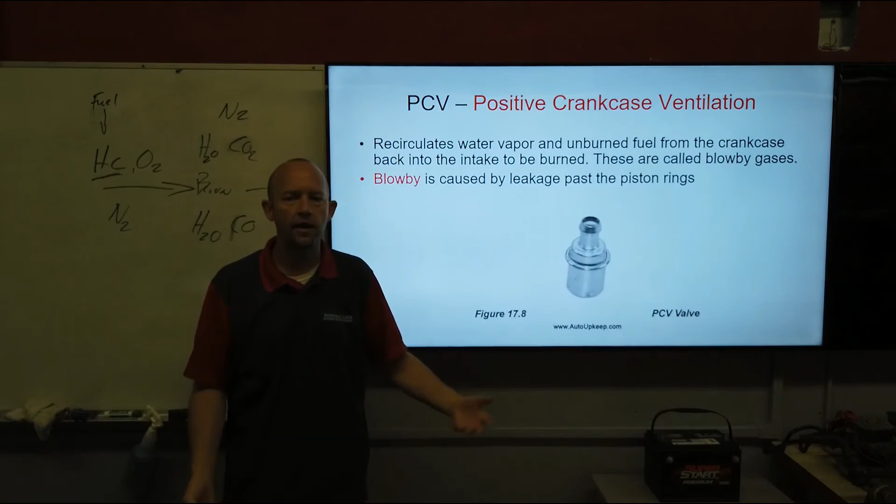But the way a PCV system is designed to work is that here's our crankcase area down below the piston and above the oil level. So below our piston, above our oil level is an airspace there. When combustion gases escape past the rings, we don't want them in our oil, so we need a PCV system for that. If the system was sealed, we'd build pressure and have leaks everywhere.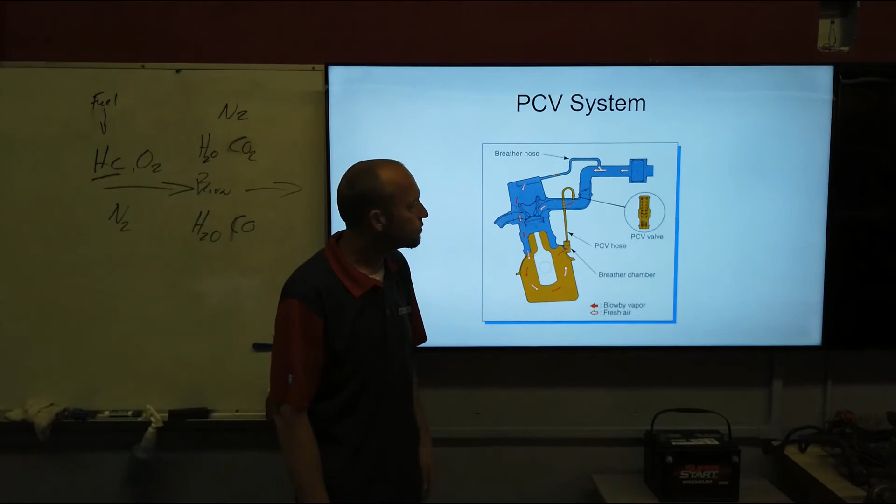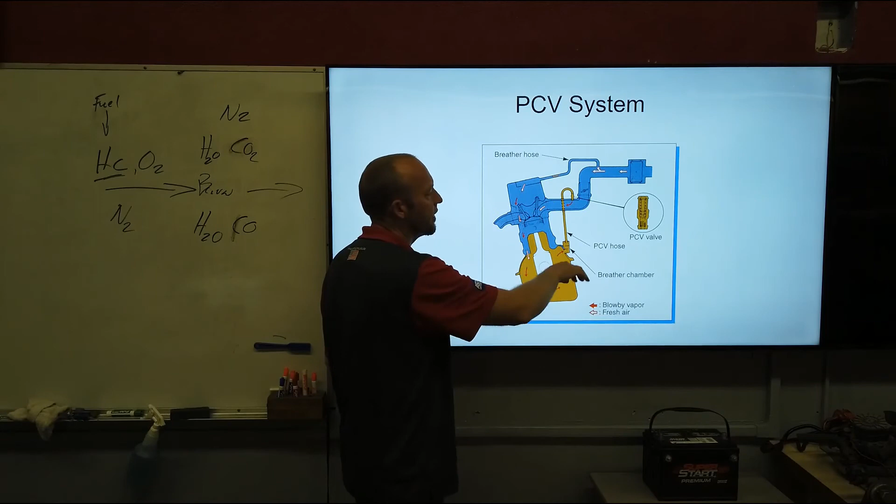So it's vented, and then it comes up to a little PCV valve that comes into the intake manifold. So manifold vacuum, we're down past the throttle plate. Manifold vacuum is going to pull and draw the air. Fresh air will typically come from an air intake duct over to the valve cover so that we can replace the blow-by gases that settled in the crankcase with fresh air. And so we get this circulation: fresh air comes in here as air is drawn out from the crankcase, and then that gets directed back into the motor to be burned.

An evap system, one of the major components in an evap system is a charcoal canister. So a charcoal canister, I'm going to grab a couple over from here and get rid of this guy. So a charcoal canister is exactly what it sounds like.

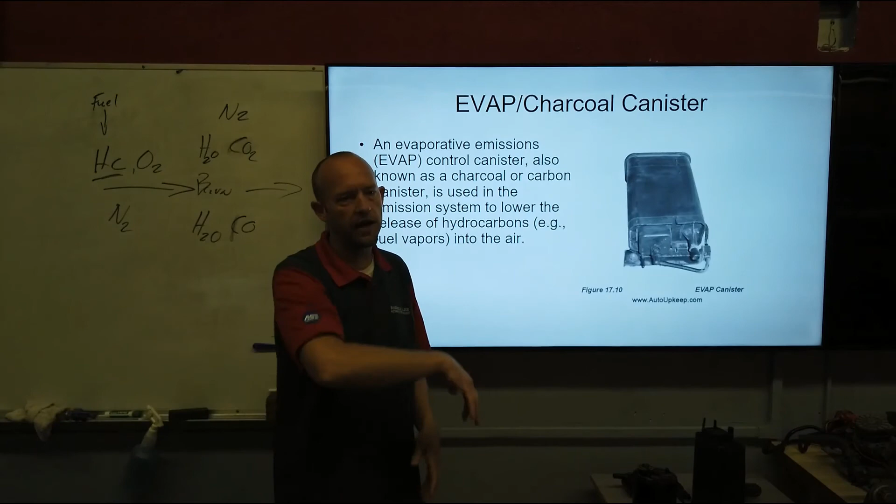It does have activated charcoal in it that when we have vapors that evaporate from the tank, they're sealed and directed over to the canister to be stored. And then, however that vehicle is programmed or designed, they're going to ultimately direct those into the engine to be burned, which is a win-win, right? We don't want to waste fuel and just let it evaporate out in the air. If it gets directed into the engine and utilized to run the engine on to some degree, then that's beneficial to us.

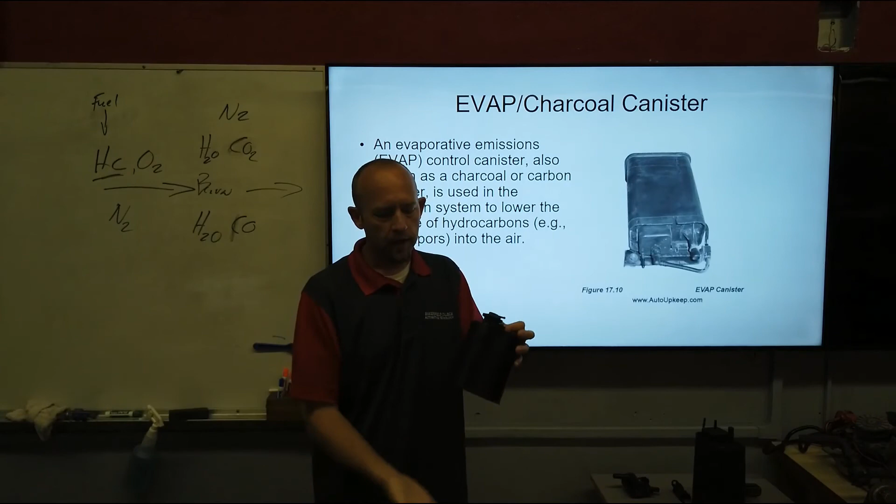The canisters that you'll see, the older ones, were vented from the bottom. So they would collect it in charcoal, then you would have a line that came from the tank to here, collected in the canister in the activated charcoal that's in here, and they had a simple mechanical control valve that when you were cruising down the road, then they would open this up and draw fresh air through this canister, and as the air pulled across the canister, it would bring fuel vapor with it, and then it could be burned.

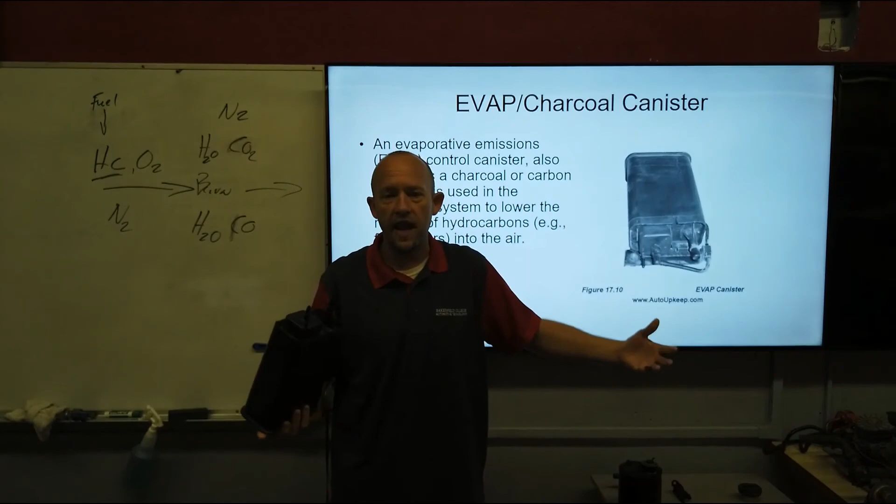Your newer systems are checking to make sure that the system isn't leaking. They're pulling the tank into a vacuum or pressurizing the tank as an active test that the computer will perform to make sure the system isn't leaking. So your newer ones, the canisters are all sealed up, and then they're controlled electronically with a vent solenoid, which is the control for the fresh air side, whereas your older ones were just vented all the time.

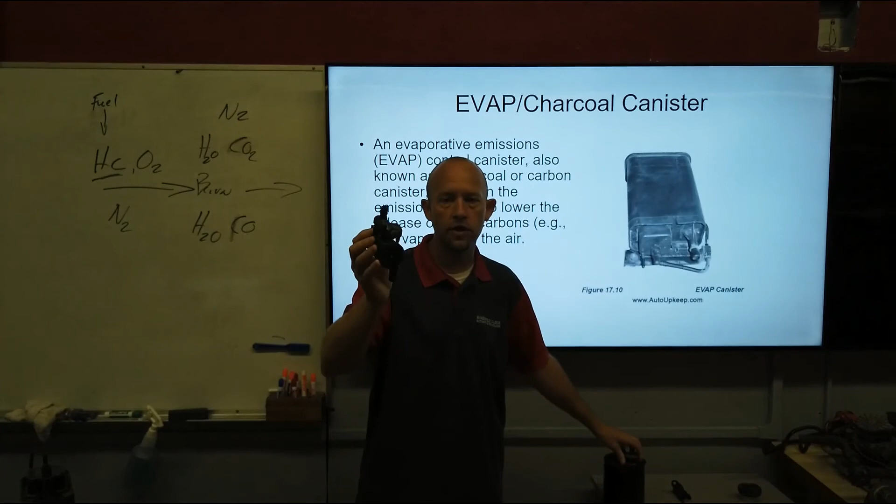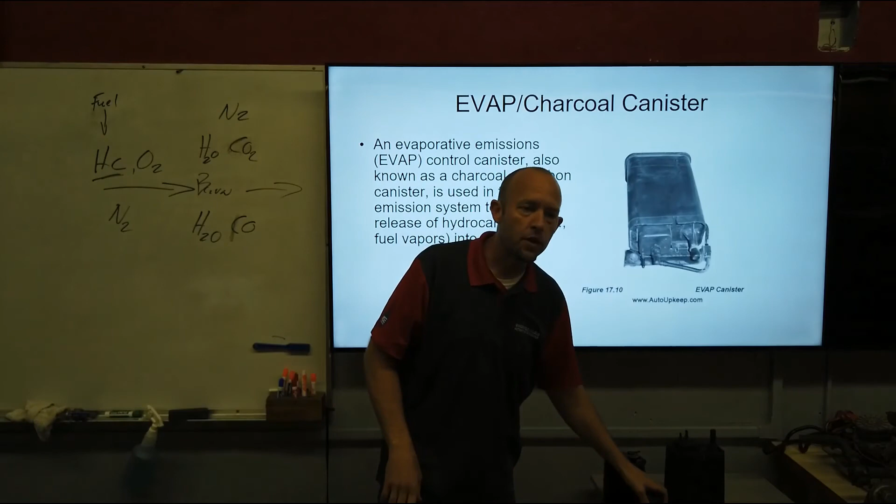The newer ones, so that they can check the system, have a little solenoid that can control fresh air into the canister, and that connects to this side over here. Then they'll have an electronic purge solenoid, and even things like your fuel cap are designed to seal off and make sure there are no leaks. So in your evap system you've got your fuel tank, your lines, a fuel cap, a vent solenoid, a purge solenoid, and a pressure sensor for when they check it.

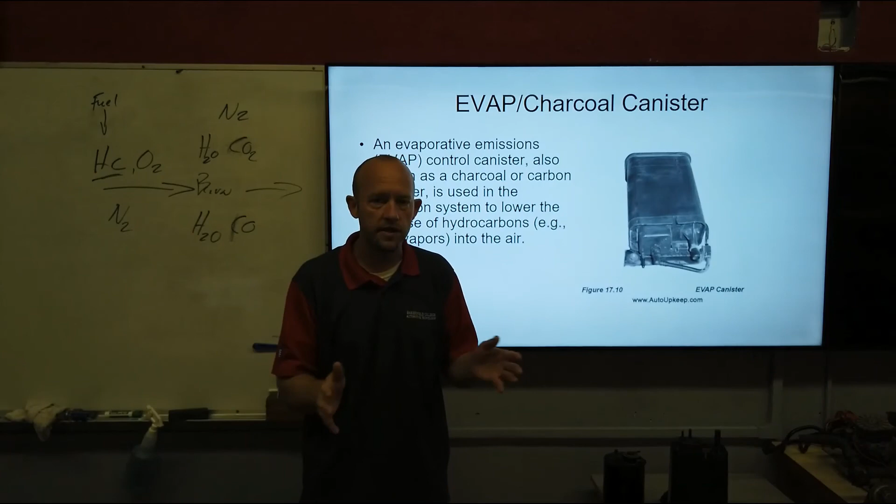Older systems could not monitor the evap system for leaks, so on the smog program, be aware that 95 and older vehicles, we pressurize their evap system with a machine as part of the smog to see if it leaks. I bring this up because you can head yourself off from a failed smog if you know that when you put fuel in the car, you smell fuel after you get back to your house, or you see it dripping because your filler neck's leaking. You should get that fixed before you smog the car, because if you have a 95 or older vehicle, when we pressurize that evap system, it's going to fail.

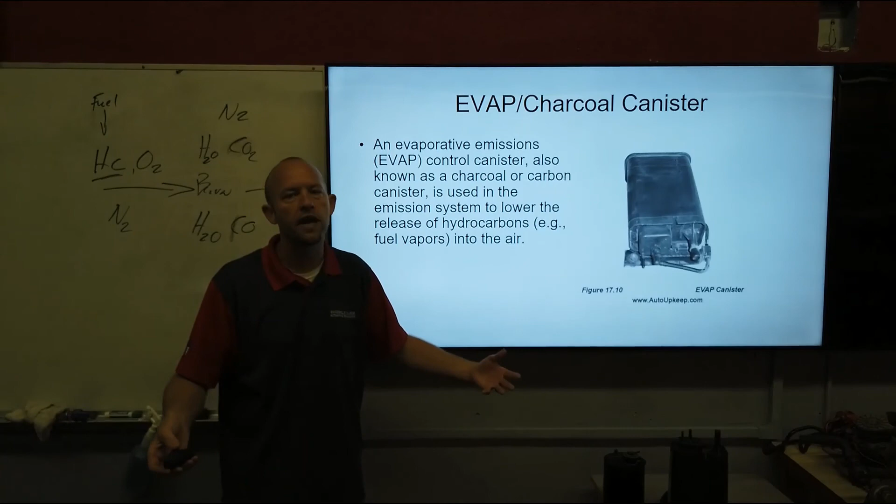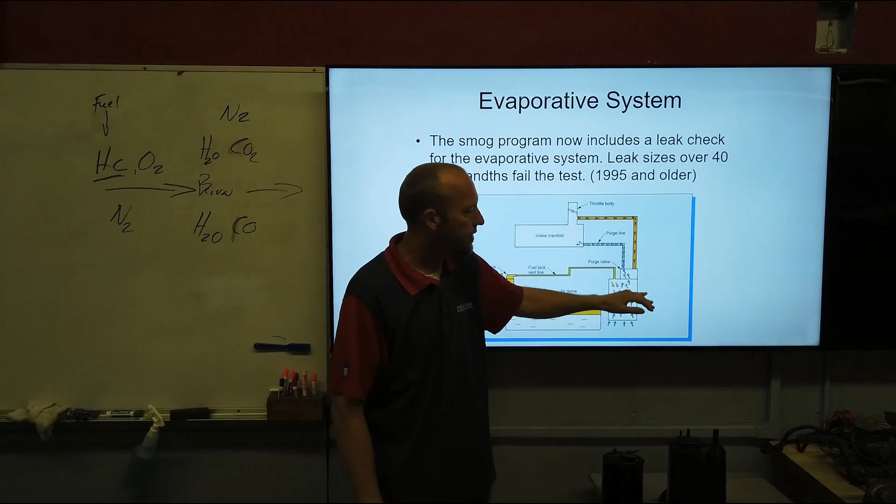An EGR system - EGR stands for exhaust gas recirculation. This is the way that system works: it controls NOx by directing exhaust gas back into the motor. Some of you guys are like, that sounds like a freaking genius idea. It is, all right, it is. The way that it works is...

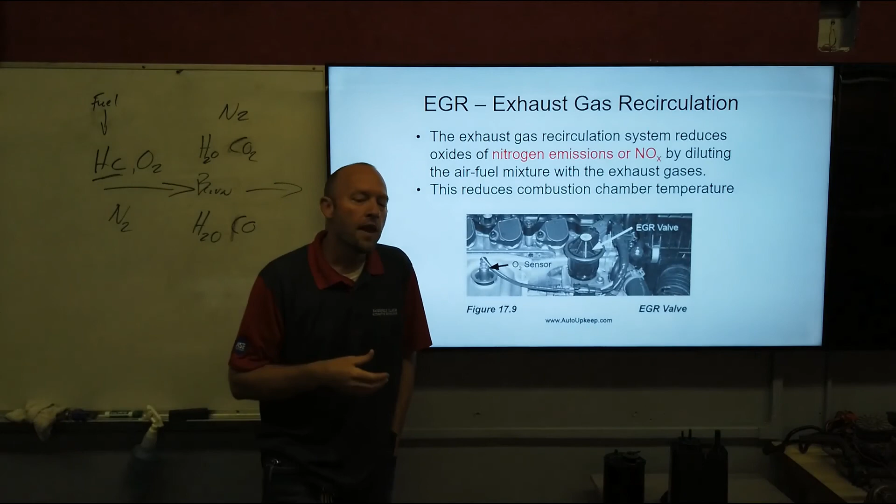If we had a normally running engine and we directed 10% exhaust gas into the airstream, then when that blend of air-fuel mixture and exhaust gas gets into the combustion chamber and gets sealed off because our valves are closed, we compress that and light it. Since 10% of what's trapped in the cylinder we can't make power from, because there's no oxygen in it, it's exhaust gas that's already been burned, then I have a smaller fire. If I have 10% of exhaust gas that can't make power, then I have a 10% smaller fire, which makes less heat. Since NOx is caused by combustion chamber temperatures exceeding 2,500 degrees Fahrenheit, if I have a smaller fire, I make less heat, and if I make less heat, I make less NOx.

Some of you are drawing the obvious conclusion: don't you also make less power? Yes, all right? So one thing I'll assure you, little Ricky racers out there, they will not turn this EGR valve on in a scenario where we need power. If you're trying to pass somebody on the freeway or you mash your throttle to the floor to where your throttle's over 75%, that's considered a wide open throttle signal to any computer. So if you're accelerating under hard acceleration, one thing they will not do is turn the EGR valve on, because the priority at that point is to make power.